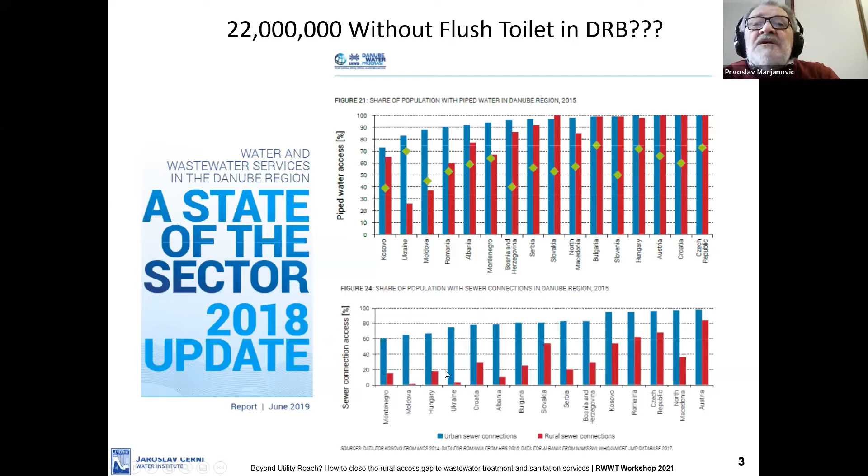That brings me to the second graph, which basically shows the disparity between urban and rural connections and really tells us where the gaps are in different countries with respect to rural population. You see that in lower Danube countries, rural population is really lagging behind.

Anyway, this is a map of agglomerations by size in the Danube River Basin, and you see obviously that the majority of those we could consider in the rural sector are in the range of 2,000 to 5,000 people, even though some of them may be urbanized slightly in the center of the communities. A large number of settlements or agglomerations could be classified as rural in character.

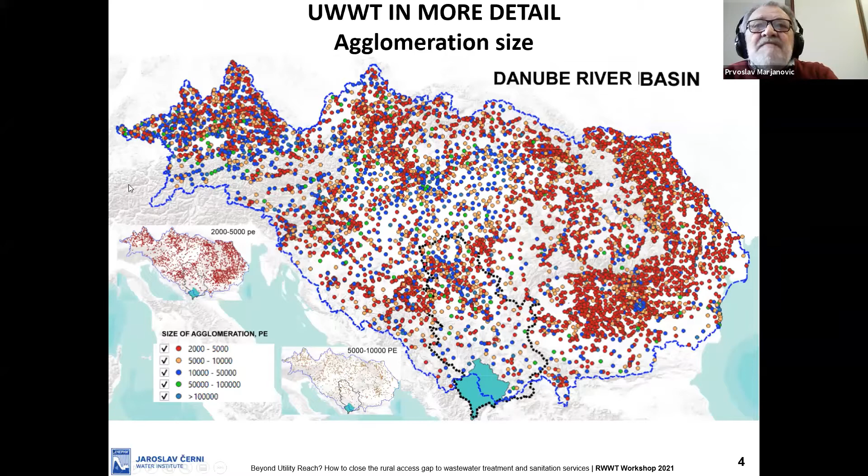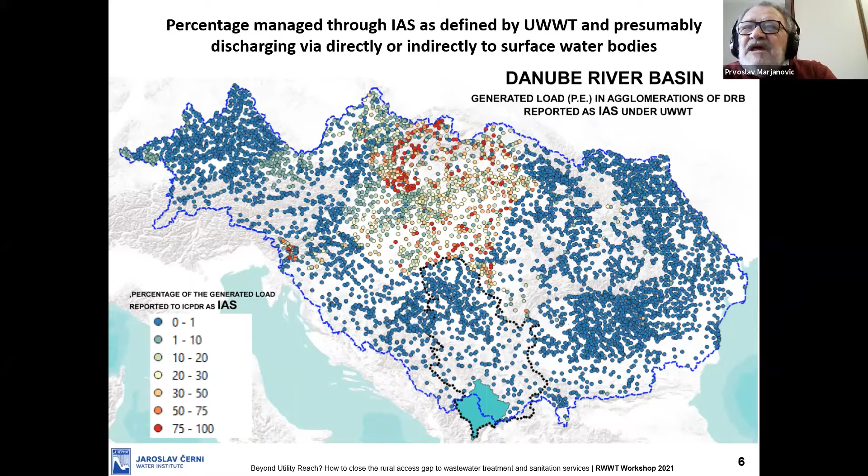Not to speak about agglomerations and settlements smaller than 2,000 people. If I look at the generated load in agglomerations which are reported as individual and appropriate systems, and the percentage of the generated load connected to those, again you see there are some differences, especially between Hungary and Slovakia. I think the reason for these differences is in the way the individual systems are reported. I have a suspicion that some of the septic tanks are reported as IASs rather than as proper treatment individual systems.

If I now look at agglomerations bigger than 2,000, and the percentage of IASs which are discharging to soil rather than the sewer system or the treatment plant by tracking the emptying of the systems to the appropriate treatment plant, you see again there is a large proportion of those communities, especially in the middle region - Hungary, Serbia, Bosnia, Croatia, Moldavia, parts of Romania - which are actually discharging into the soil. Now, soil as a recipient of treated or untreated wastewater is not recognized by the Water Framework Directive or the Urban Wastewater Directive, which I think is a major problem.

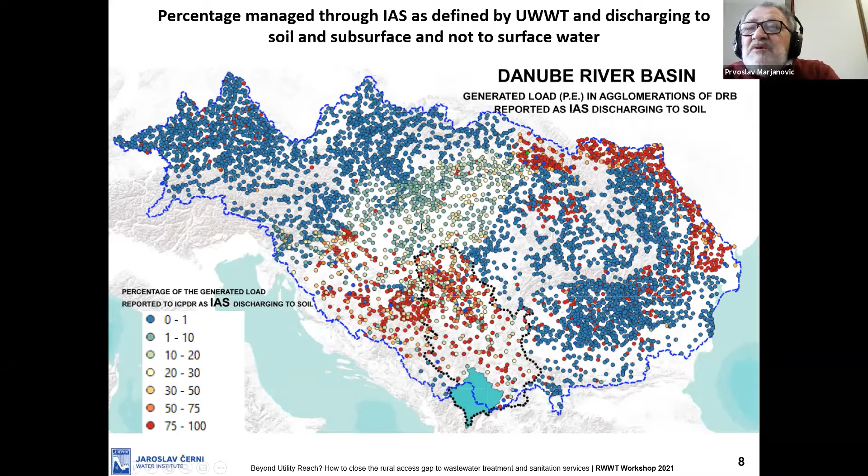That again is pushing us in the direction of having to connect all these people to centralize, or to discharge into the wastewater, into the water streams rather than avoiding it. If we do that, I think the impact on the environment is going to be much bigger on the status of water than they are currently.

If I focus on Serbia, this is the distribution of settlements, not agglomerations, in the different size classes. You see again that less than 2,000 is the majority, which we understand. 2,000 to 5,000 is a significant number. The rest is manageable easily by centralized systems - 5 to 10,000, 10 to 50,000 and so on. In Serbia, we have delineated 398 agglomerations, taking care of some 745 settlements bigger than 2,000.

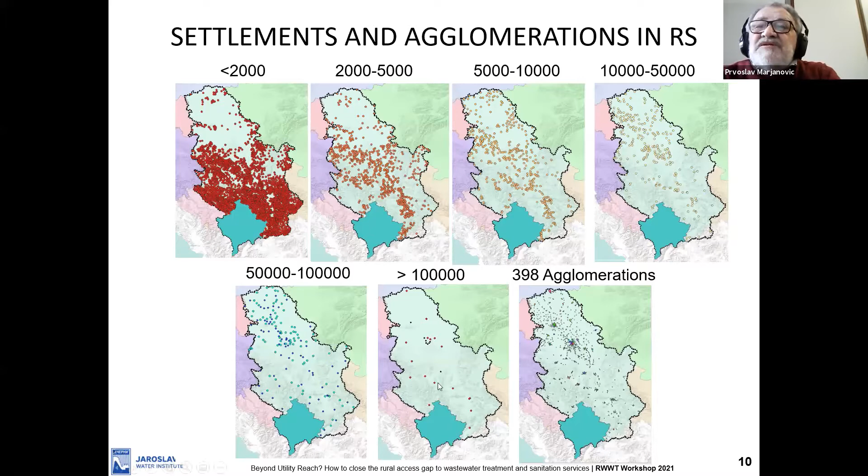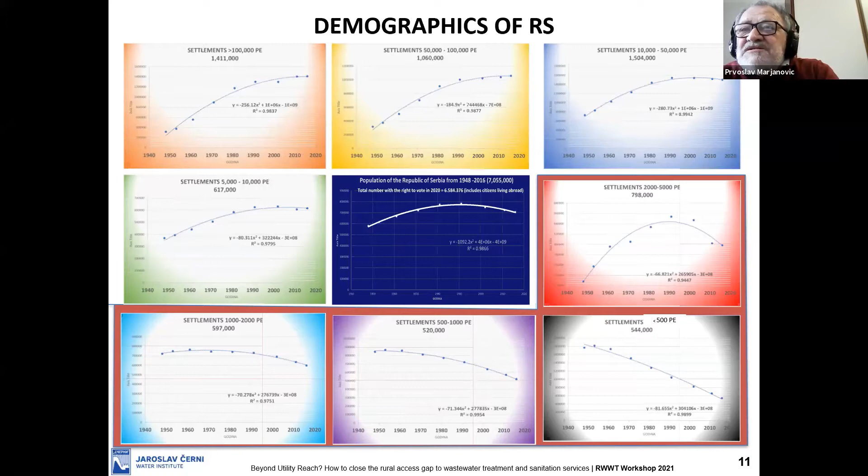Now, the major problem we have, as Konstantin mentioned yesterday, is depopulation. If you look at the trend of the population in different class sizes, you see that the communities less than 5,000 people are all on a serious decline rate. The national population seems to be stabilizing, or at the beginning of a declining trend, in communities bigger than 5,000 people. So for those there's no question about going to centralized systems, but for those from 5,000 down, I would be very reluctant to go and design collective systems which will not serve the people who are disappearing in those communities.

If I take Serbia as an example and look at the percentage of people in different settlements, not in agglomerations of different sizes, served by individual sewerage systems—and I include in individual systems even septic tanks and pit latrines, fully aware they're not adequate treatment—you see that 95% or more on individual systems covers a large territory of Serbia and thousands of communities.

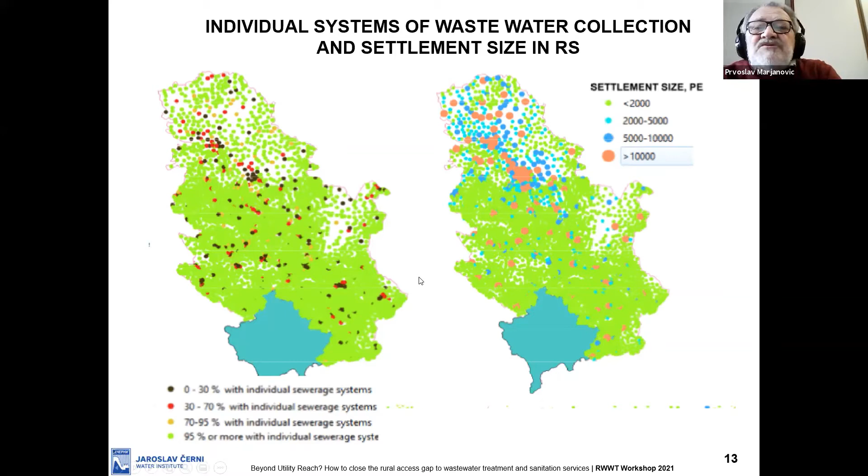When I look at the character of those communities, communities less than 2,000 are typically rural, with approximately 600,000 individual systems serving them. Mixed systems, 2,000 to 5,000 people, have approximately 205,000 individual systems in place, and 325,000 individual systems in urban and peri-urban settlements bigger than 5,000 people.

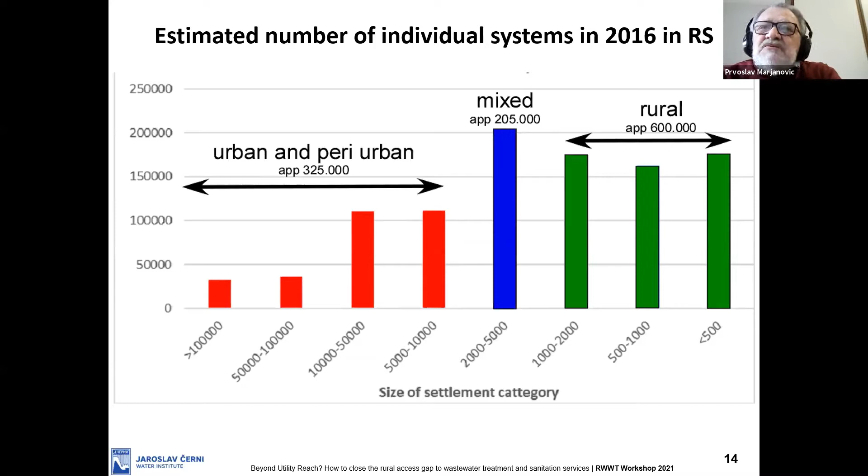Those in red should probably continue—we should push them to connect to the centralized wastewater treatment system, unless you give some exceptions for the outskirts of the cities. The blue and the greens, I think, do not merit collection systems, centralized and central wastewater treatment plants in my mind.

When I look at the current planning in Serbia, we are planning according to the detailed implementation plan for the Urban Wastewater Treatment Directive some 2.3 billion for construction of new sewers. That's assuming everybody will be connected to the central system. 92% of investment in the network is for new sewer systems.

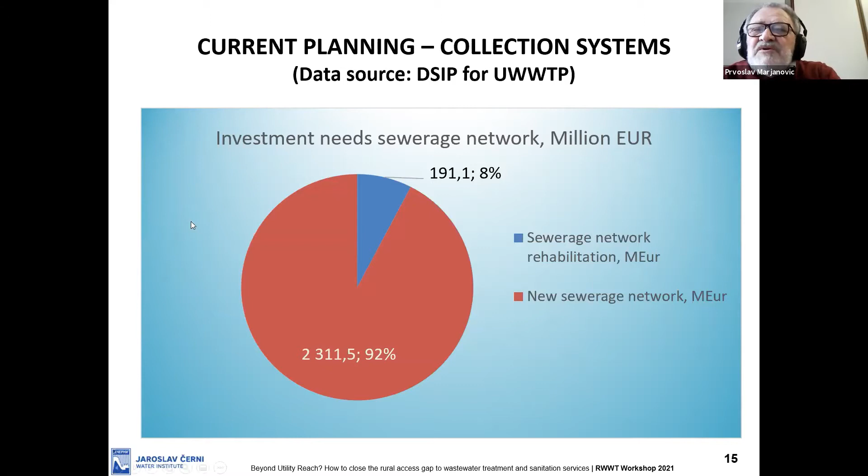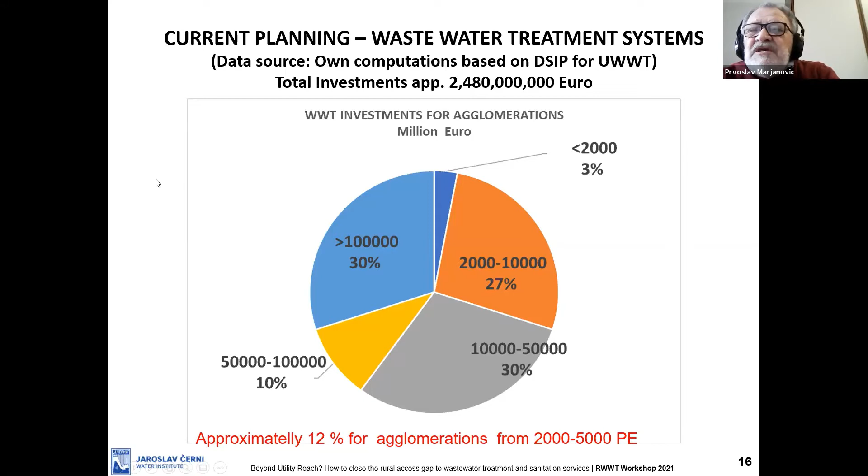If I look at wastewater treatment itself, some 30% goes into medium-sized communities, the bigger proportion of the population. Some 30% goes to communities bigger than 100,000, but 27% goes into communities between 2,000 and 10,000 people, of which, when split between less than 5,000, you see about 12% of the investment going to wastewater treatment in communities less than 5,000 people, assuming they all get connected to the sewer system.

Now, for the sake of argument, I'm going to assume we're going to stop building any new sewer systems, and all those not currently connected will go into individual systems in communities smaller than 5,000. If I look at the potential for savings, the red ones will definitely stay centralized, the 5 to 10,000 will also largely stay centralized, and the others will go to individual systems under that assumption.

This gives us a figure of about 1 million individual systems to be installed, dealing with the total population of Serbia, including those in settlements less than 2,000 people, not only in agglomerations. Also, for the sake of argument, if I assume those figures, it's possible to save around 2 billion euros on construction of new sewers and some 350 million euros for centralized wastewater treatment.

These savings would allow us to consider subsidies for some 600,000 households, to the level of approximately 4,000 euros per system, to supplement the investment of households in constructing proper individual and appropriate systems at individual households in those areas.

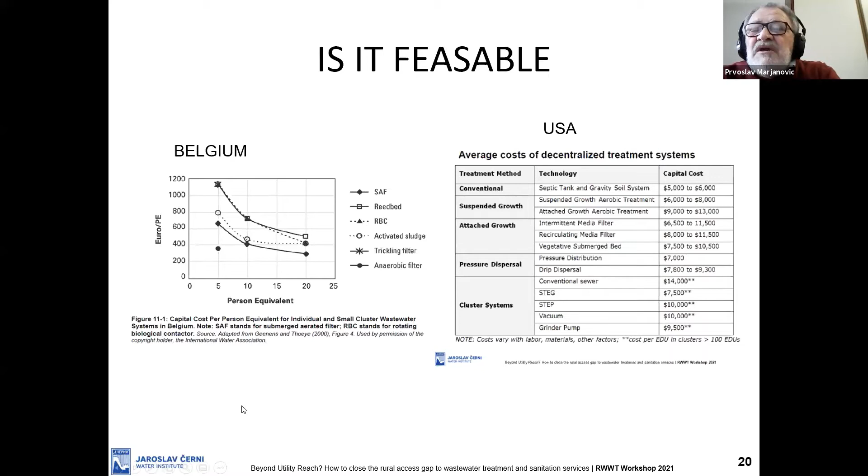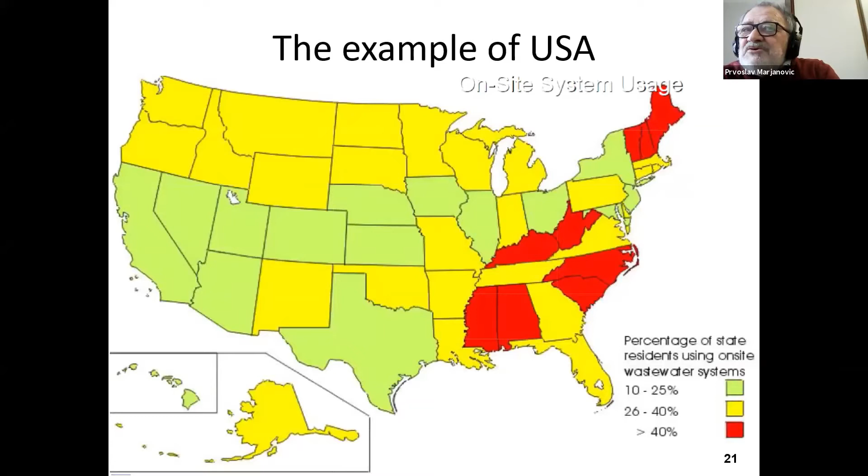Similar costs in the United States are also documented and well described. If you look at the United States itself—and I would also urge people to consider the experience of Belgium—you see that the developed East Coast has many states with a large proportion on individual systems. If it's feasible for them, I don't see why it's not feasible for the lower Danube Basin.

In closing remarks, I want to state that detailed analysis is obviously needed on all costs and benefits. There are many additional advantages which are possible and realistic by going individual systems in smaller communities and rural communities especially, such as flexibility and mobilization of additional funding from the individual houses, because the subsidy program will not fund 100%.

You can attract additional funds from the households to invest on their property. You can create a whole new industry for installing and maintaining those systems, creating jobs, and so on. You just have to develop proper management models to do that.

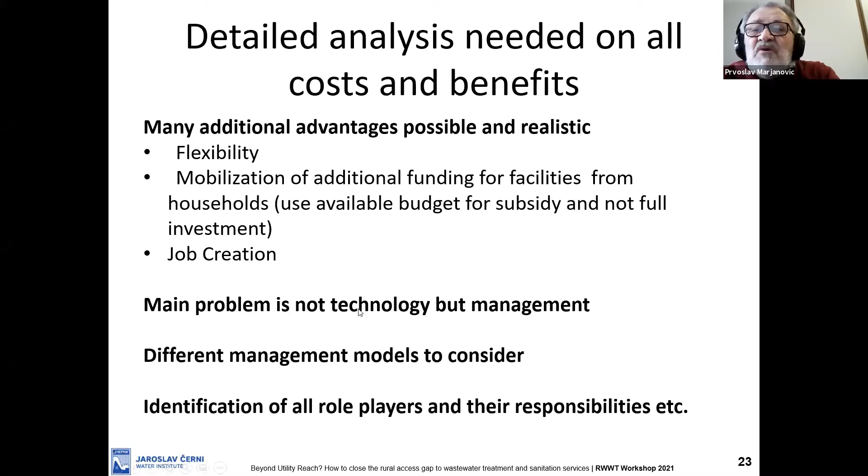The main problem is really not the technology, and I'm sure this will be addressed in the next session. The problem is really in the management of those systems, as Konstantin mentioned—they don't have the capacity to manage these small systems. The problem of management is something to be considered very seriously, and different models for management are possible and can be considered. It's also important to identify all the role players and their responsibilities.

Just to show you some other advantages, this is a diagram coming from the Rocky Mountain Institute, published in 2004, on the role of decentralized systems, and I suggest everybody looks at that report because it documents details of advantages and disadvantages of decentralization. The investment and stepwise investment in centralized systems creates a lot of spare capacity and investment in unneeded capacity, especially if your population is declining. Your lead time for designing and implementing larger systems is 5 to 10 years.

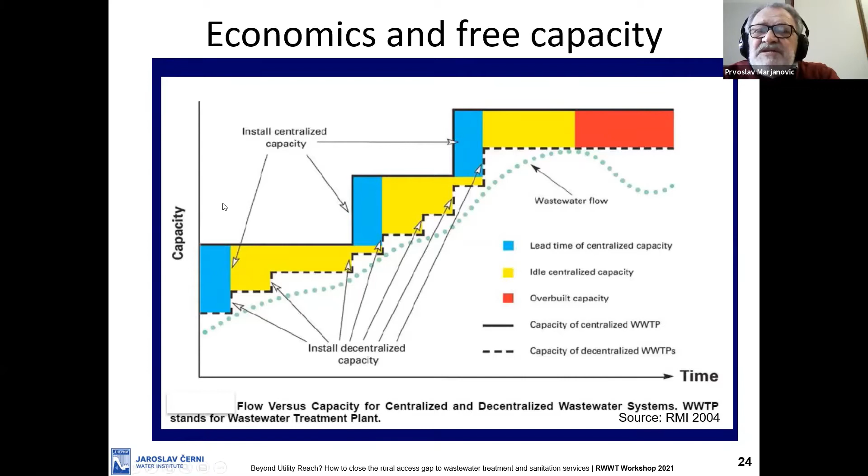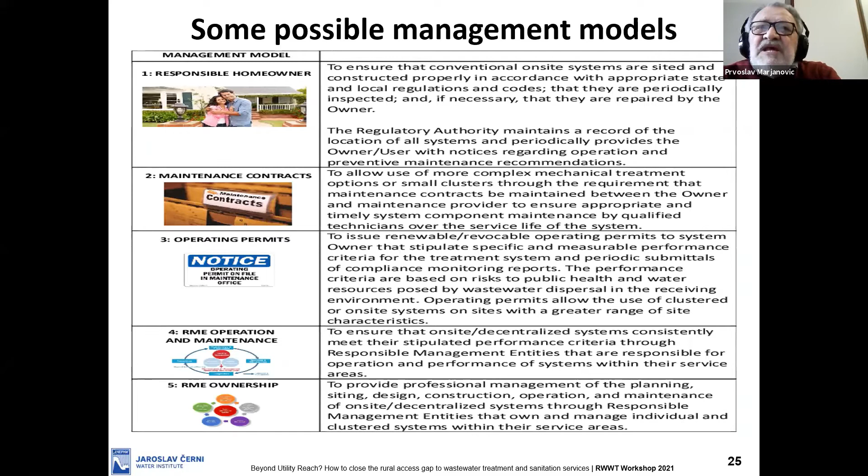Your lead time for implementing individual systems is 1 or 2 months if you have everything in place legally and so on. The different management models that have been used in different places are varied, and I just mentioned 5 here from the United States. These different management models have different role players, and each role player, from a regulatory authority, service provider, owner, user, all the way to responsible management entity, if you create such an agency in your country, and the role of each particular role player in different phases of the implementation of individual systems are clearly documented and can be

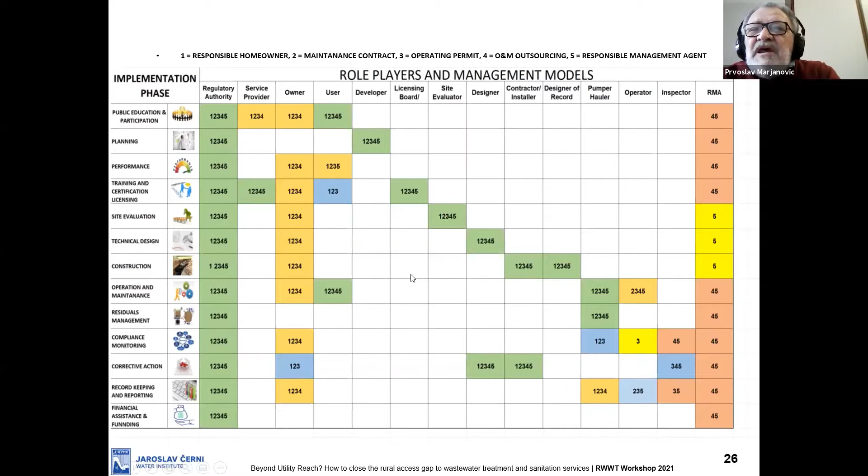implemented. I think the requisite for this is an enabling legal framework from the EU and national governments, which I believe is currently not the case, even though Ireland has gone a long way for providing this, and people are advised to look at the case study of Ireland, especially in light of the court case that they lost against the EU, and then implementing changes to their Water Services Act, and now it's possible. It's time to start thinking with an open mind and stop ignoring the potential of individual and appropriate systems because of difficult management issues that can be easily resolved.

It's time to get soil recognized as a recipient of treated wastewater primarily, and I think it's very pertinent and applicable to the Danube River Basin, especially the lower Danube for communities and agglomerations smaller than 5,000 equivalents. The problem really is that our experience with on-site treatment in the past has been bad. Doesn't mean that the future has to be the same. Sewers are not really the sign of modern civilization. Sometimes we have to question those approaches seriously.

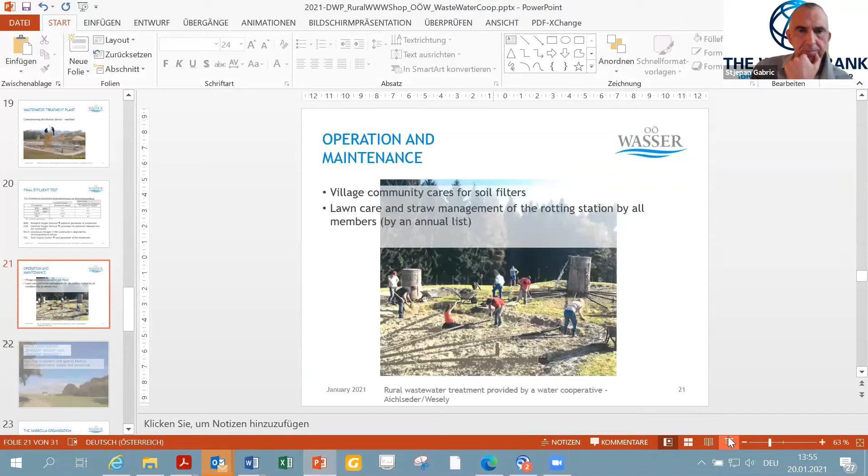But your presentation actually serves as a very good introduction to our next presentation. This is the experience of how to organize service provision in a sizable number of small communities acting with some kind of umbrella organization. So Upper Austria Water and Mr. Aichlseder, General Manager of Upper Austria Water. Please. Ladies and gentlemen, Stjepan, thank you very much for your introduction. I start my presentation. Just a moment, please.

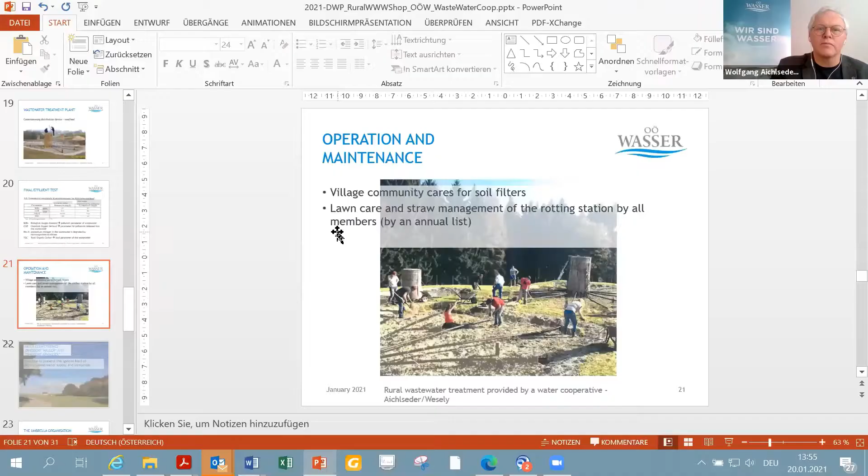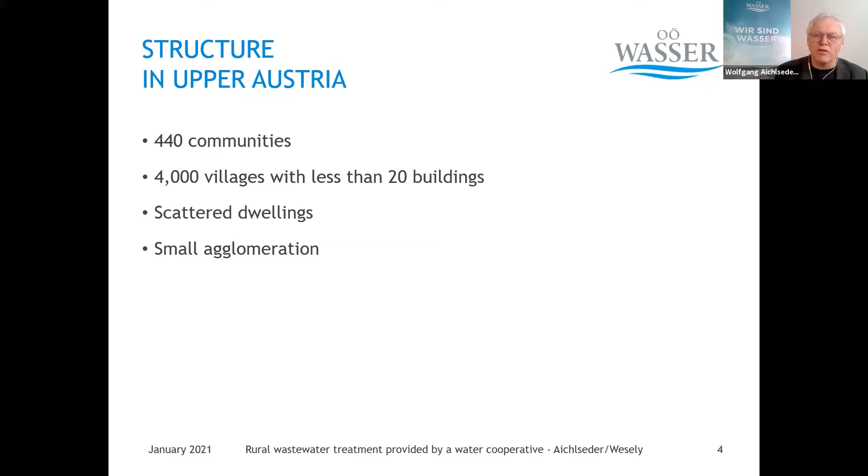So, yes, I talk about a report about rural wastewater treatment provided by a cooperative in Upper Austria. And I made the presentation with the chairlady of the cooperative Dingdorf, Hermine Wesely. Okay. So Upper Austria, a state of the Republic of Austria, is in the northwestern part. And we have a hilly region, and in the south we have mountains with narrow valleys. The structure is that we have 440 communities, but we have more than 4,000 villages with less than 20 dwellings. So we are a scattered and small agglomeration.

One of the solutions we support are water cooperatives. Water cooperatives are the user, owner, the responsible persons, and they have the principle that they are public corporations referred to in Austrian law. They are also controlled by the local authority. They are self-determined and they have a personal responsibility for their organization. One of the principles is also cost covering. The organization is such that all members have to pay the costs.

Water cooperatives, like communities, are financed by connection fees, by basic charge and consumption charge for the operation. And they also have the possibility to get subsidies from the state and from the Republic. They also have the possibility to get credits and loans.

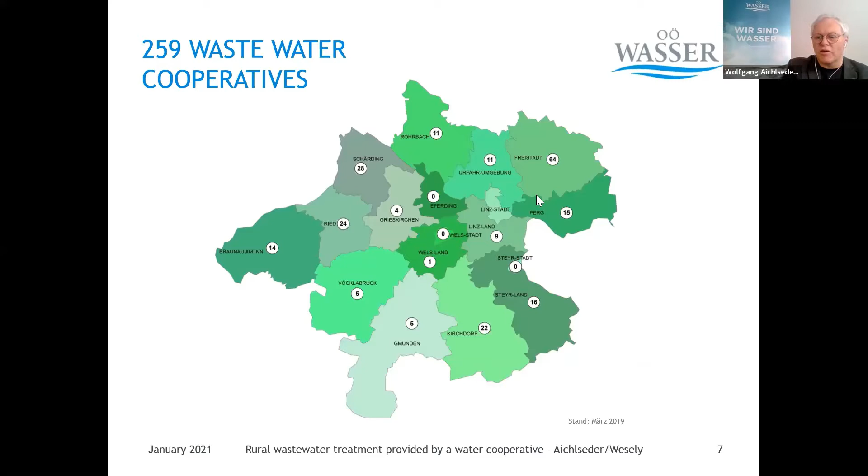In Upper Austria now we have about 260 cooperatives in the regions, and I think in all regions we have it, but most in the hilly side of the northern part of Upper Austria. The member structure is that the small villages, up to 10, up to 30 households, are a topic to organize cooperatives for wastewater management.

In Austria, we have more than 3,400 water cooperatives, but they are also dealing with water supply, irrigation, flood control and melioration. For me, it's a solution predominant in the rural areas, in the small villages, where they can get an organization with inhabitants from the village.

I show you an example, the water cooperative from Dingdorf, from the founding to the planning, designing, constructing, and operating a small sewage and wastewater treatment plant. The foundation was 2006. The village had 23 households and 2 farmers. And in June 2009, they started with the construction of the plants, and 1 year later, it got commissioned by the local authority. In the middle, you'll see the chair lady, who has a lot of men to support her.

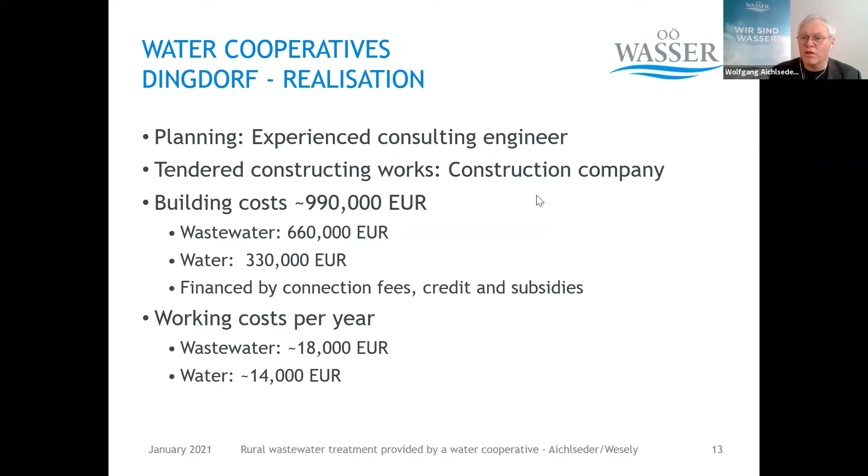So the annual working cost per year is about 20,000 for wastewater and 15,000 for water. 2/3 of these costs are the payback of the credits. The system is about 2,200 meters, PE installed, and the village is located on a hilly side, so it was easy to get the sewers and they can provide it by gravitation. The plant is below the village, and so no pumping stations are necessary.

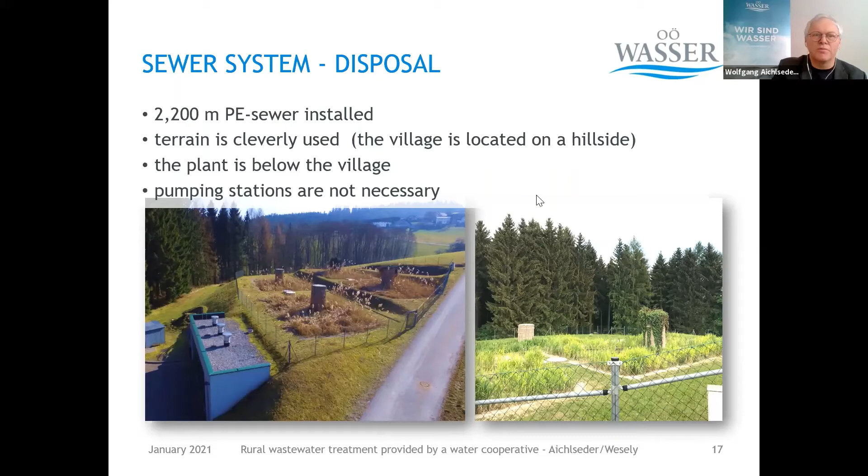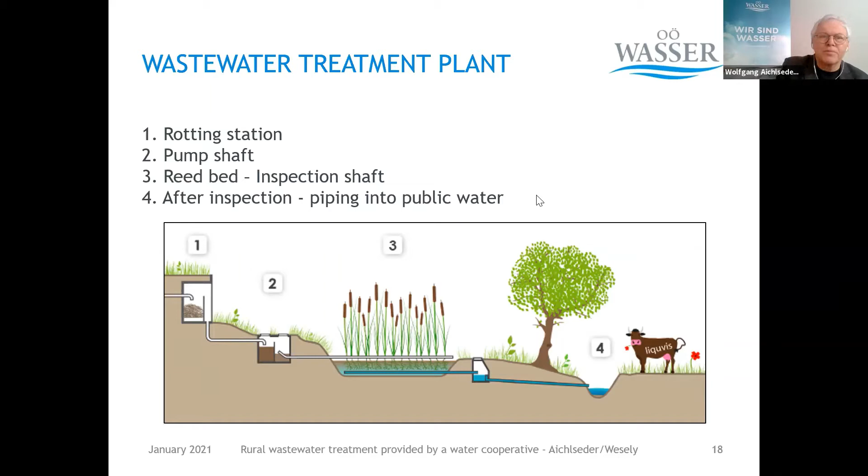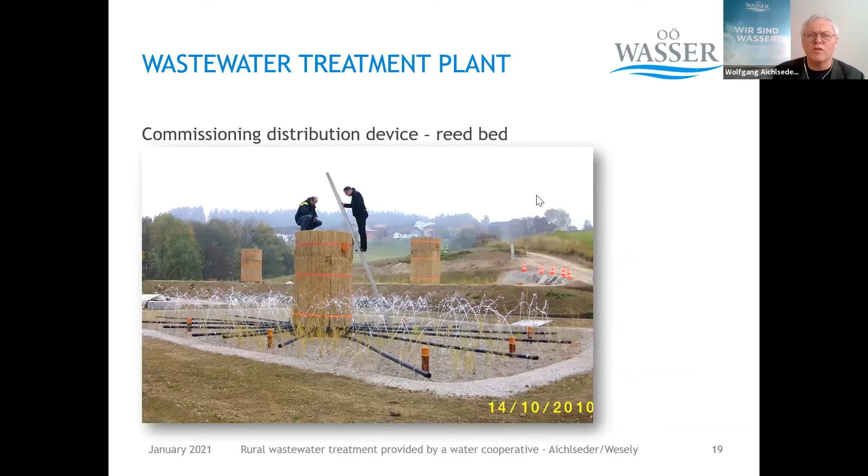The wastewater treatment plant was not a package plant, it was a reed bed filter system, first with a rotting station with straw, and then the wastewater comes to the reed bed filters, and after an inspection shaft, the effluent is disposed to a small river, to a ditch. Here you see a photo of controlling the distribution devices during the construction.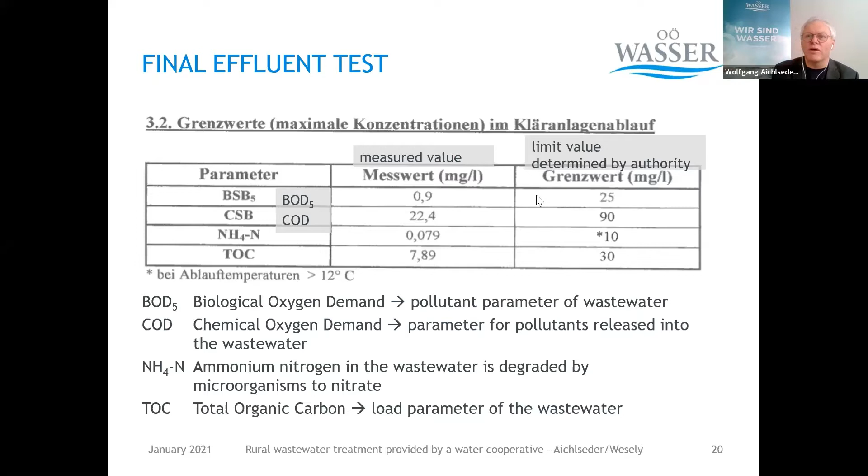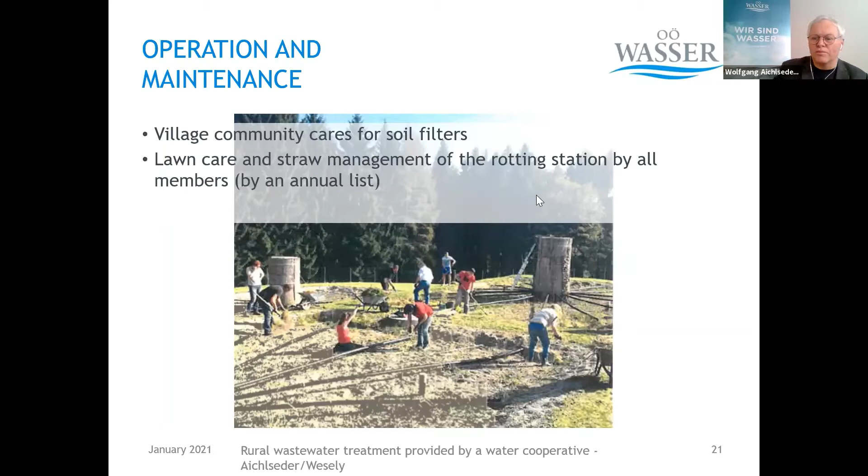The water cooperative was consulted by the umbrella organization, Upper Austrian Water. This organization was founded in 1946, a long time ago. It was founded by a resolution of the Upper Austrian Parliament, and also the general manager and the office are financed by the Upper Austrian government. The main objectives are teamwork, speaking with one voice, to pool ideas from the members,

and to support interested villages in founding water cooperatives, to help them to buy spare parts or equipment, to organize civil engineers, and also to hold training courses, and to represent their interests in the Austrian government administration. You see, the education program is courses for chairpersons, for cashiers, for water managers, and for attendants.

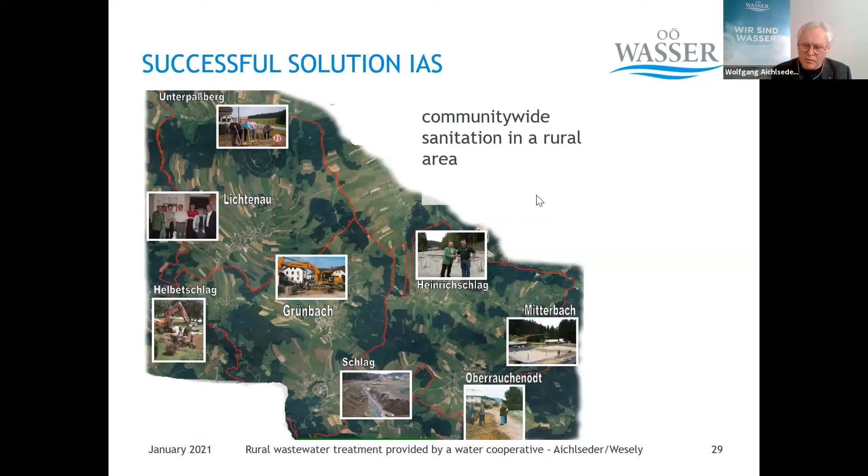Let me show one other successful solution. This is also in the northern part. There is a rural community with 8 villages, and the 8 villages built together, for every village, a solution to make wastewater cleaning plants.

So the organization of Upper Austrian Water supports the cooperatives to be self-determined, to be cost-effective. So the solutions are local-based and independent. They have to do their own work. And when I see 1946 up to now, we have a long time experience to show that this sustainable model should also be fit for the future. So thank you.

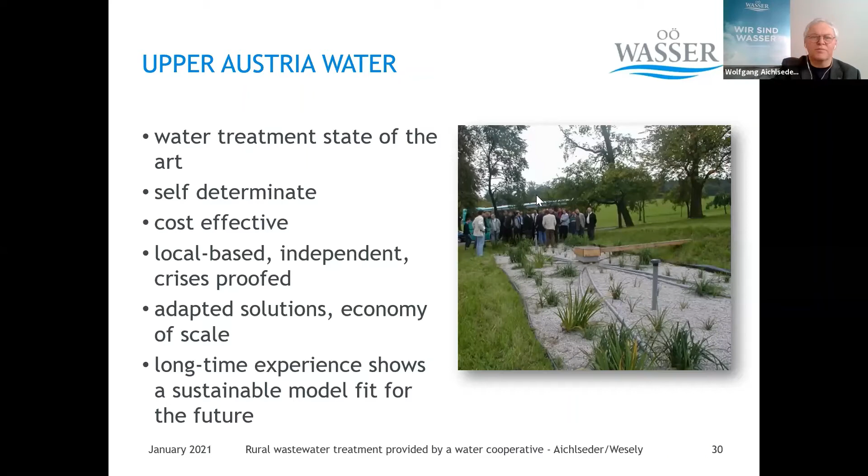Thank you, Wolfgang. Maybe a quick question before we move further. How unique is this form of association cooperative for Austria? I mean, does it only exist in Upper Austria, this kind of umbrella organization, or do similar organizations exist in other parts of Austria?

Cooperatives are in every part of Upper Austria, mainly in Upper Austria and Salzburg for water supply, but also for wastewater in Styria. And umbrella organizations are in Salzburg and also in Styria and the Burgenland. Nowadays there is discussion, and I'm consulting in Carinthia. And we have models in Ireland, in Spain, in Denmark, in Finland.

And our Upper Austrian model is covered in Uganda. So in Uganda, they have 6 umbrella organizations for the whole country. And in Uganda, for example, they make water supply and sanitation. It's both. So not only water supply, not only sanitation. The model is that the villages make both together.

Thank you. I think it's actually a very good model that could be replicated in many other parts of the region, not fully utilized. I would definitely advise people to explore it further on their own. We also have a possibility to ask additional questions during the Q&A session after the presentation.

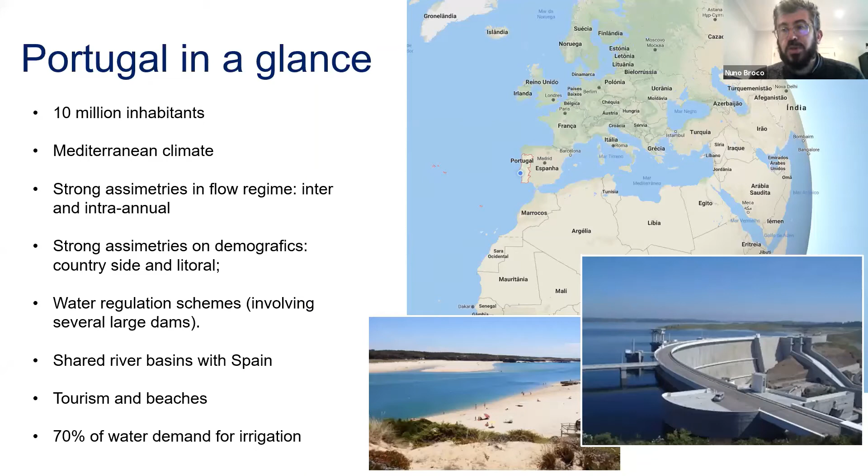First of all, Portugal is in the west part of Europe. Of course, you know it, but we have this Mediterranean climate, and we are a very asymmetric country. We have the majority of our cities in the coastal area and the inland part with small agglomerations of population. For us, water is central, even seawater, even raw water, since we share most of our river basins with Spain. So for Portugal, water is one of the central topics.

Well, a brief presentation about ADP. We are a public company. Our shareholder is the Portuguese state. We were founded in 1993, and we have made an investment during these last 27 years of about 7.5 thousand million euros, and we serve around 80% of the national population. The remaining part is served by other operators in Portugal, and we employ around 3,000 employees at this moment.

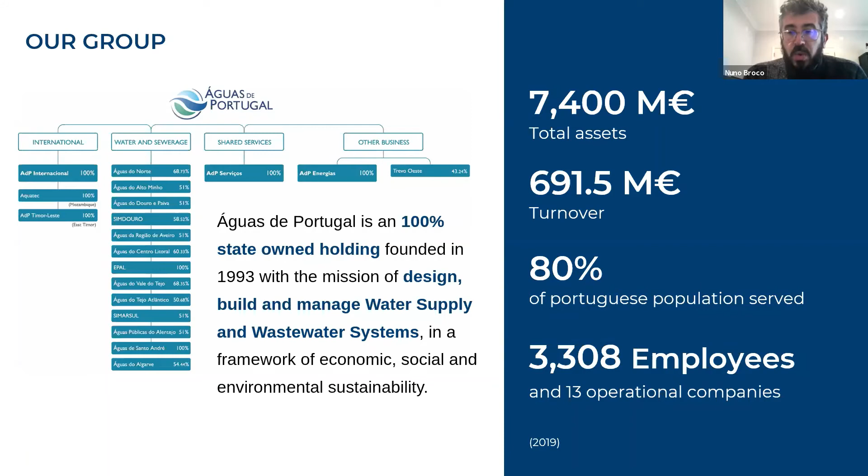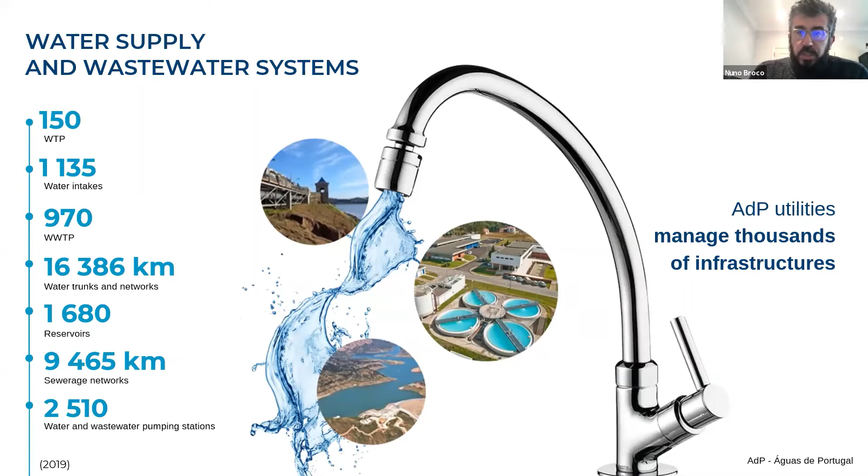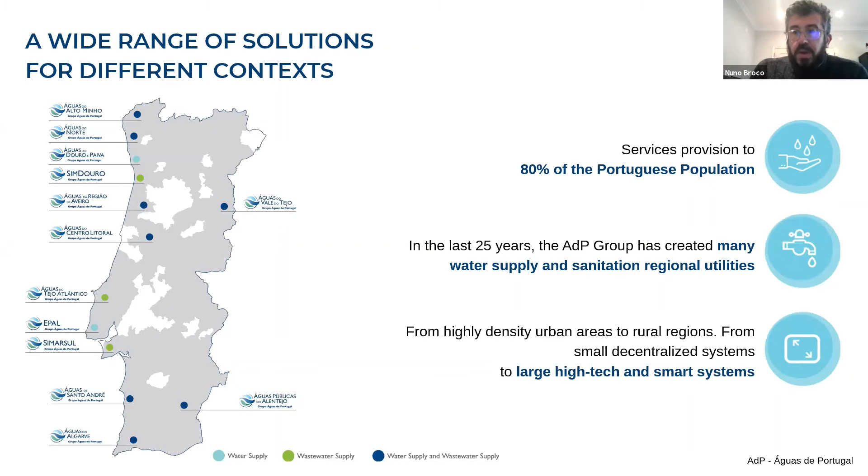We manage a huge number of assets, water and wastewater, mainly on the bulk part of the system. The retail part of the water system is the responsibility of the municipalities for most of the areas where we are. Like I told you before, we are a small country, only 10 million inhabitants, but the biggest part of our population is focused on the coastal area, and the rural area is in the countryside. So we have a big challenge in terms of management of our assets. We have big plants in the coastal area and very, very small plants in the inland part of the country.

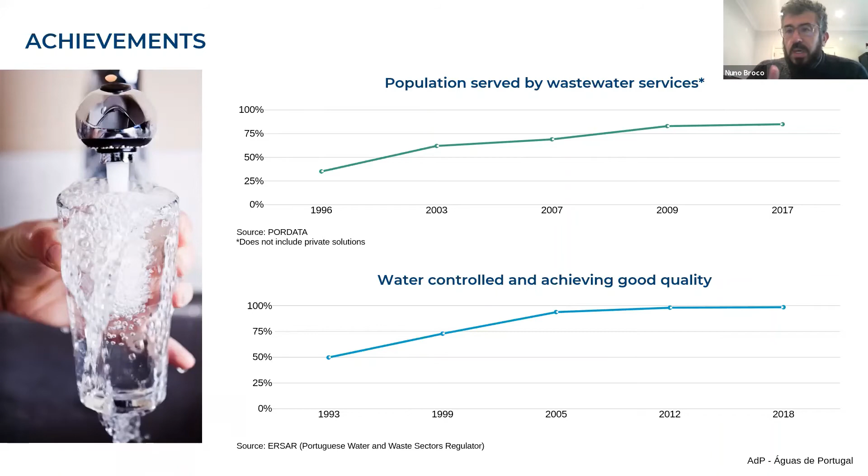During these 25 years, we have achieved important results in terms of sanitation and safe water. Although this graphic shows only 80-something percent of the population served by central wastewater service, some private solutions are not included. So at this moment, Portugal has a coverage of service around 90-something percent. Well, how did we get here?

It's important to share with you our story from the last 25 years. 25 years ago, Portugal had a very poor service in terms of wastewater and water supply. The responsibility of this service was under the municipalities. We have a very important number of small municipalities, and some lack of capacity in their operations. So 25 years ago, only 15% of our wastewater was treated in proper wastewater systems.

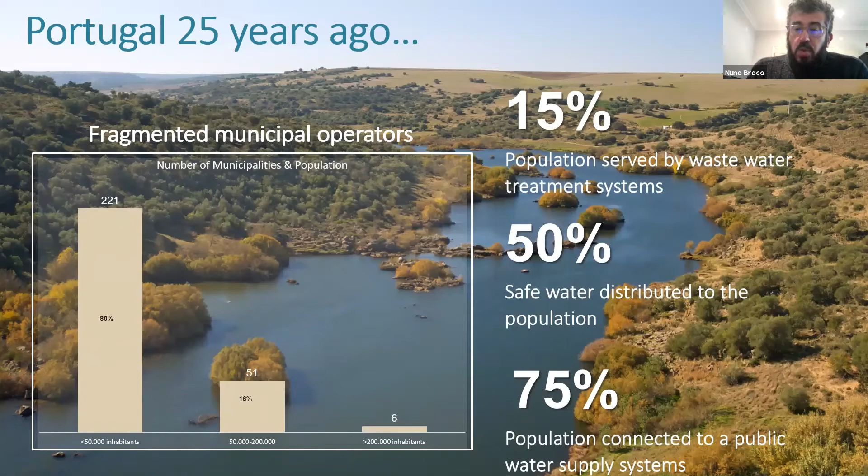Only 50% of the water distributed was safe, and only 75% of the population was connected to water supply systems. So at that moment, this was the big picture for the water sector in Portugal, with a huge infrastructure gap, low performance, low quality of service, very inefficient, with a talent deficit that was one of the major reasons for that, and that was not sustainable.

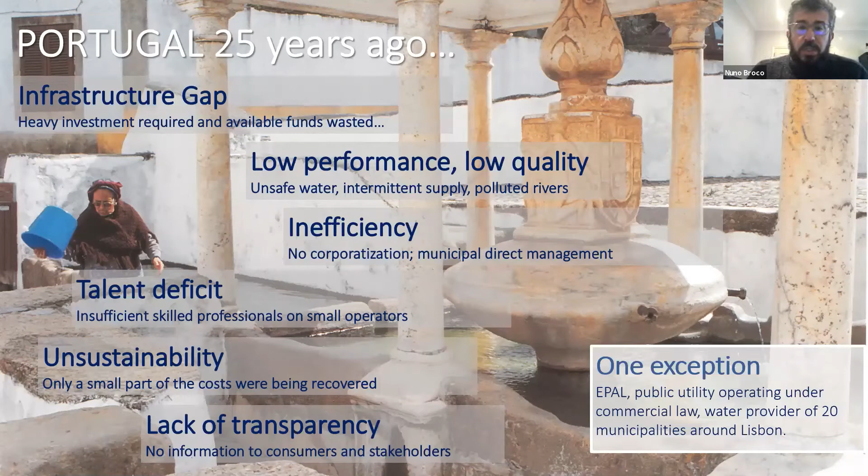We had at that moment an exception, that was EPAL. It was the operator for the Lisbon area, for a set of municipalities around Lisbon. It was a very old company with more than 100 years. And that was the exception, and the Portuguese government took the decision in 1993 to use that example to create a new company that was Águas de Portugal, and it was needed an institutional reform to do that.

So at that moment, with Águas de Portugal, it was created a new concept that was multi-municipal systems. This was partnerships between the central government and the municipalities, public partnerships that operate with a concession contract. This contract includes a capital investment plan. We operate under a full cost recovery model, and we have a very powerful regulator in Portugal that regulates all these operations. So this was the framework in 1993.

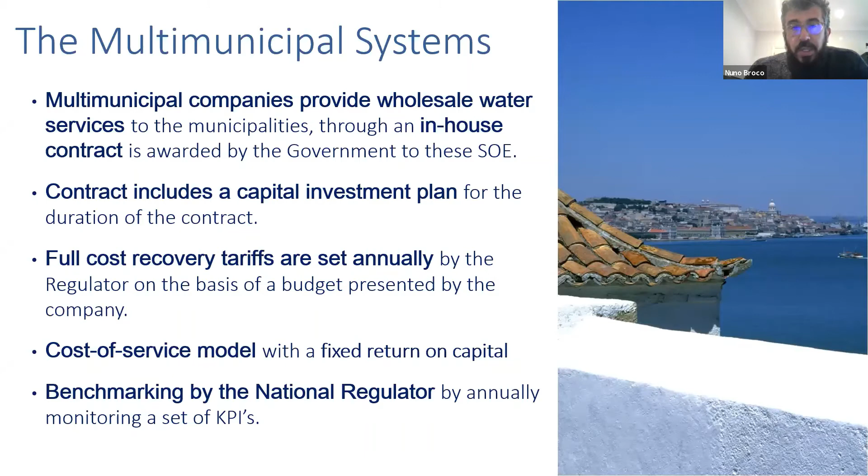In that moment, we focused our main attention on the coastal area. So we dedicated our investment plans to this first generation of multi-municipal systems, and we created a set of new infrastructures, and increased a lot the quality of service in this coastal area. The results that we achieved at the end of 1999 were very good, and the Portuguese government took the decision at that moment to expand this concept to other regions of the country.

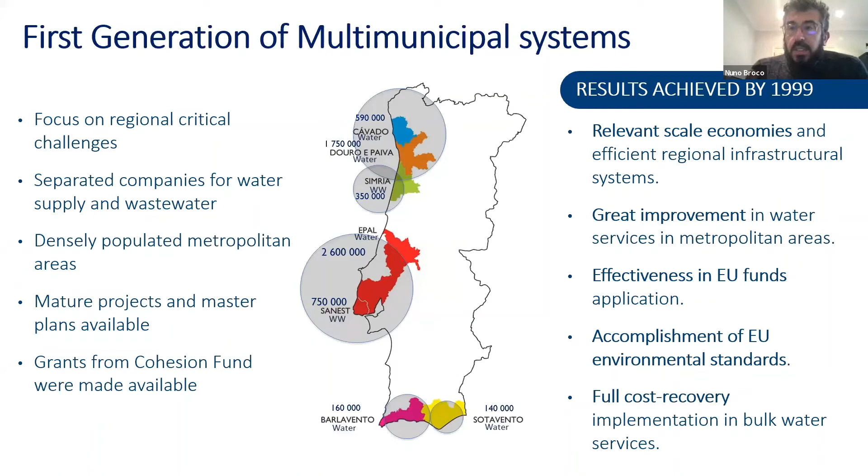So now we arrive to the main topic of this workshop. That was, for us, the second generation of multi-municipal systems. But at that moment, some decisions were very important, because the model that we applied to the coastal area was not possible to apply to the inland part of the country, because we had a very low population density at the inland part, low income from that population.

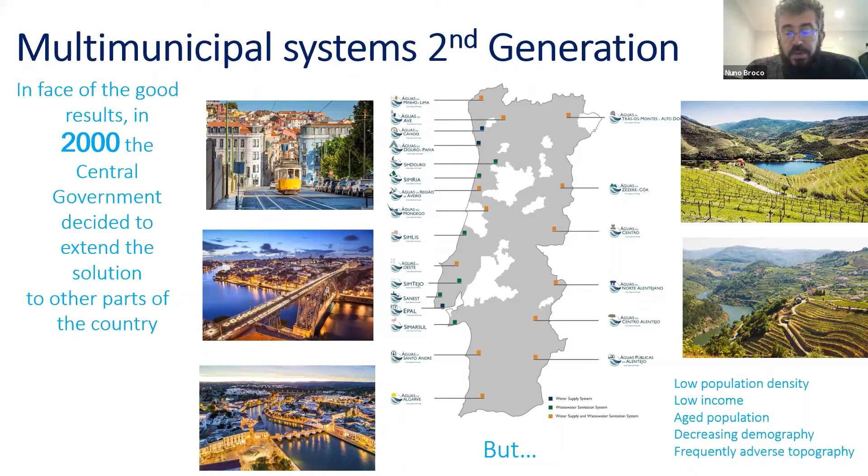The population was very old. Some desertification process was going on in the inland part of the country. We had a decreasing demography, and the topography of the inland part of the country was very different from the coastal area. So a different approach was needed for this second generation of multi-municipal systems.

So at the moment, the main question was how to close the rural access gap to wastewater treatment and sanitation service. With a very difficult topography in the inland part of the country, we found out that we need to build around 500 wastewater treatment plants in this part of the country. The largest part of them were below 2,000 inhabitants. These 500 wastewater treatment plants only serve around 6% of national population and represent around 20% of our global investment.

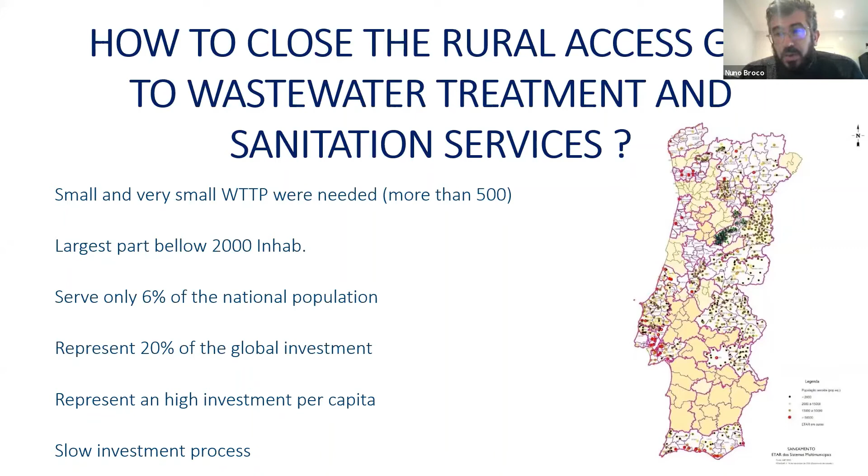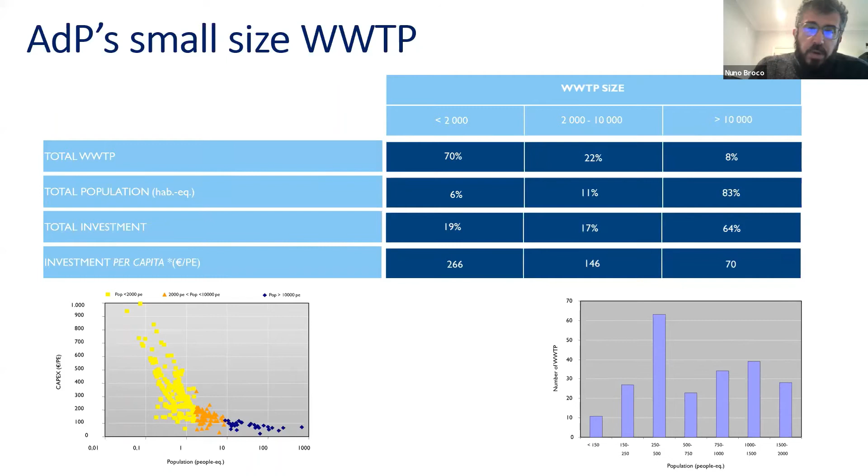So this was a huge challenge at that moment. In this picture, you can see these numbers, and the total number of wastewater treatment plants below 2,000 inhabitants is around 70% of our total number of wastewater plants. But we only serve around 6% of the national population with that, and this brings us to the investment per capita that is very high when compared with large wastewater treatment plants.

So that was the issue at the moment, and we had some goals in terms of the investment plan. We had the goal to make a standardization of these wastewater treatment plants. We had this goal mainly because we want to minimize the project and tendering time.

We know at that moment that CapEx and OpEx optimization were crucial for the success of these operations. And of course, we had full compliance with legal discharge limits. One of the concerns was the operation of this huge number of systems.

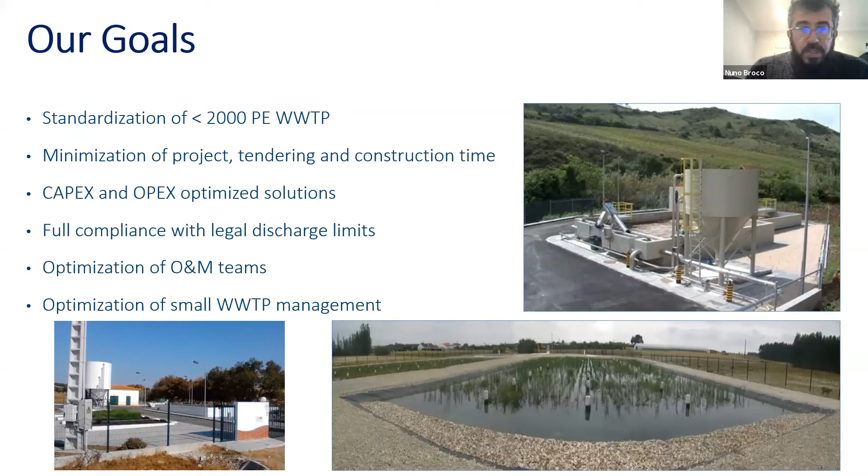So our approach at that moment, in the beginning of 2000, was to define a global solution, a set of global solutions. We pre-engineered a set of solutions for these small decentralized wastewater treatment plants. We introduced that in a decision support system software, which gives us back all the price lists, drawings, project specifications, and tender documents. This was one way to speed up our investment plan, with the second goal of having new assets with controlled operation and maintenance costs.

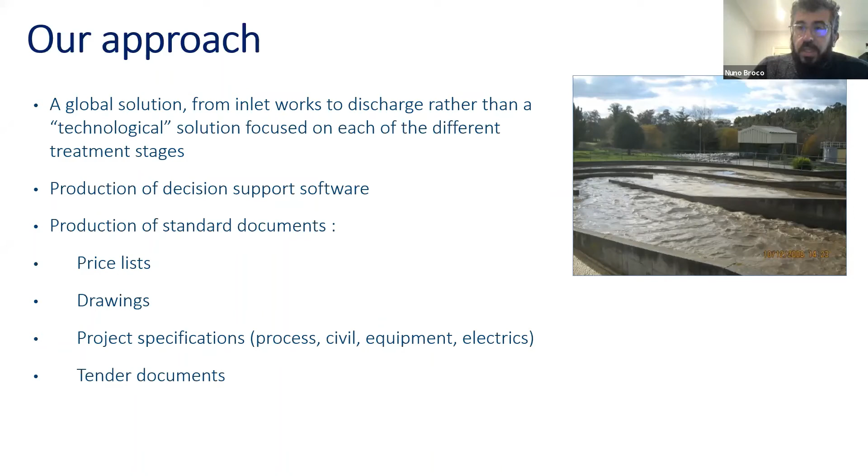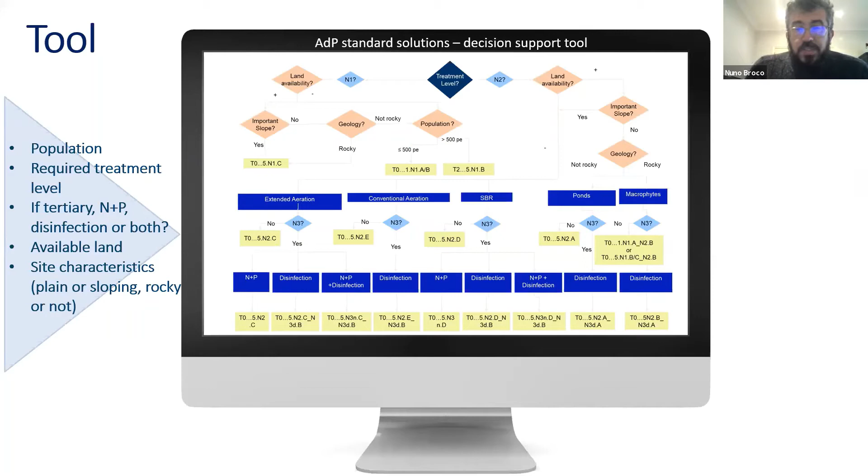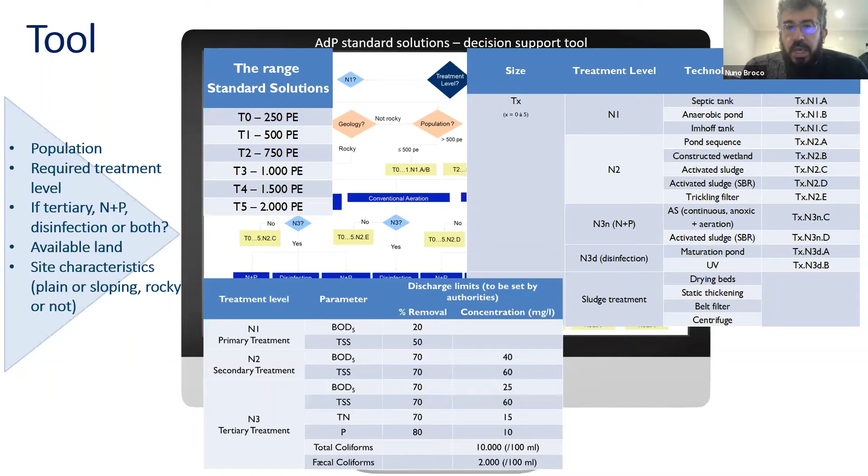So this is an example of our tool. It's very simple, because the pre-engineering has already been done. We introduce the population, the required treatment, the available land, and the site characteristics. We have a decision tree in this software, and we have standardization for a range of dimensions of these small wastewater treatment plants, from 250 inhabitants to 2,000 inhabitants, with different requirements of treatment, and we reach the final treatment line. So this is the input of the system.

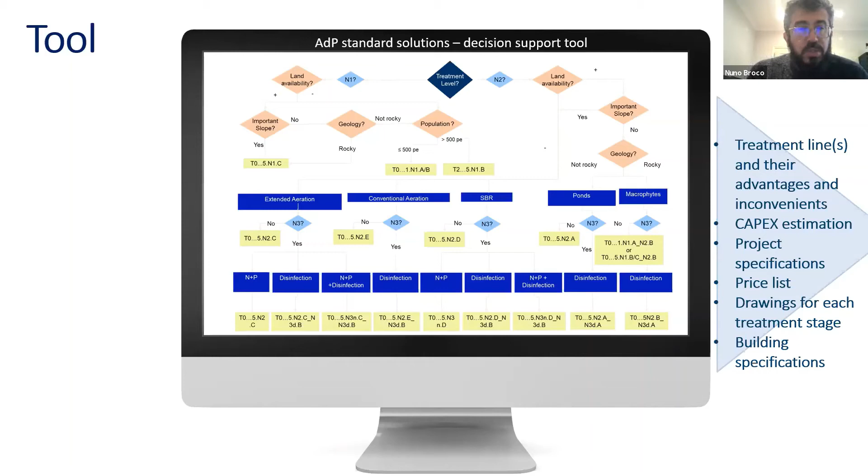At the output of the system, we have what we aim for in terms of tendering documents. We have the decision, or suggestion, about the best treatment line, a CapEx estimation, the project specification, pricing list, and so on. So we move forward to the tendering process with this output.

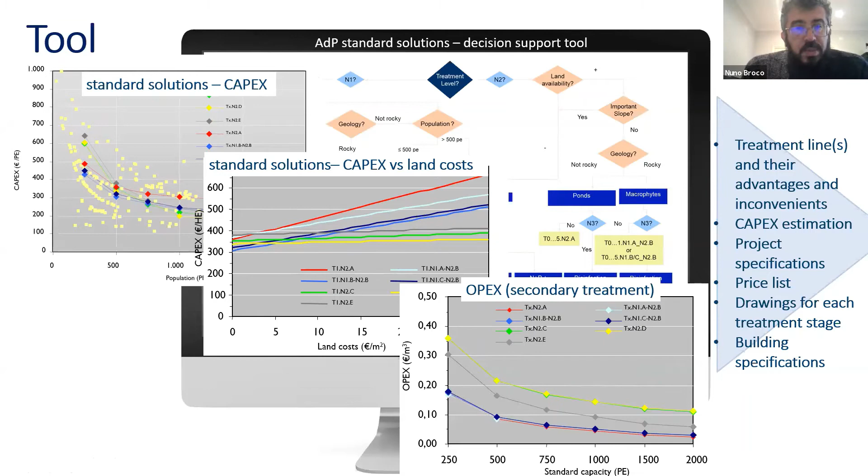So these are some examples of CapEx estimations and analysis that we can do with this software, and also the drawings that we get from this approach.

So, to resume, with this approach during this decade from 2000, we have pre-engineered all our solutions. We have built more than 500 wastewater treatment plants, and we comply with public law. We tender according to public law in Portugal, which is not always very fast. We have made this standardization of solutions, and we have made this optimization of CapEx and OpEx, which was also very important for us.

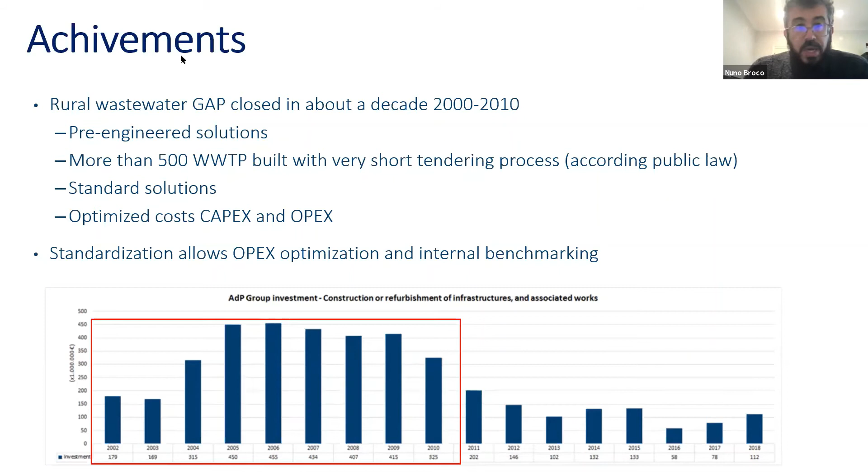Now, to conclude, we are operating these systems for 15 years, some of them 20 years, and we have some modifications in the context that are bringing us to a new stage of our engineering. Rural population keeps decreasing in these areas. Some plants were built for 500 inhabitants, and now we have 200. We have new technologies available. We already have 20 years for most of these plants. We have some aged infrastructures, and we have a set of new challenges inside the ADP group: energy neutrality, circular economy, digitalization, and others. And we have this return of experience from 15 years of operation.